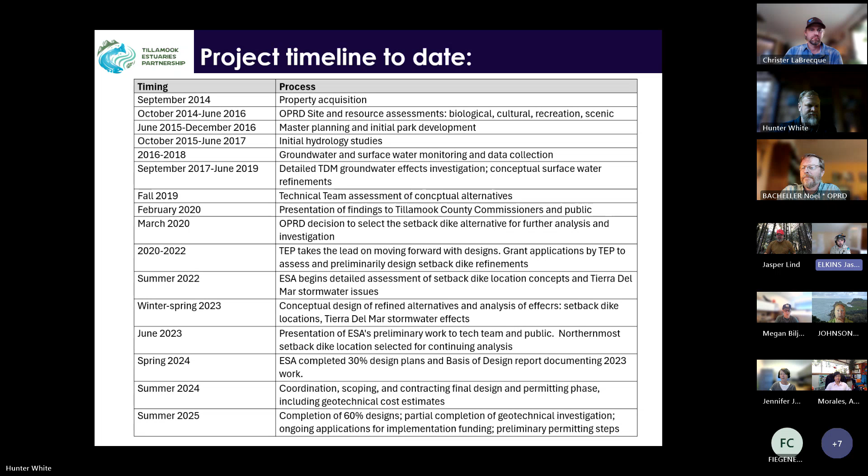We got to 30% design in spring of 2024, and we are currently at—Hunter and ESA just finished up 60% design. We'll be having a town hall on that October 3rd, on Friday. And with that, I'll get to Hunter, I believe.

Yeah, thanks, Jason. My name's Hunter White. I think most of you know I'm the senior civil and water resources engineer with ESA and project manager for ESA, pushing this design towards completion and permitting, working towards construction. So as Jason kind of recapped the long history and timeline of this project, this slide here is really the design phase that we're in now.

Back in fall of 2023, as Jason said, we presented the alternatives analysis, and shortly thereafter launched into our actual design process, taking that towards construction drawing format, and really a lot of the work and investigations that have fed into the permit applications that we're working on now.

Kind of skipping through that, here we are now. We've just completed our 60% design plans and sent those out to all attending here. With the 60% design set, we've also been working hard on the permit applications.

We completed a wetland delineation and functional assessment of the site, a cultural resources investigation, and geotechnical investigations. We've also been doing a lot of coordination with other sub-consultants on our team: geotechnical engineers Shannon and Wilson, as well as David Evans and Associates, who are designing the bridges, structural engineering, and roadway engineering.

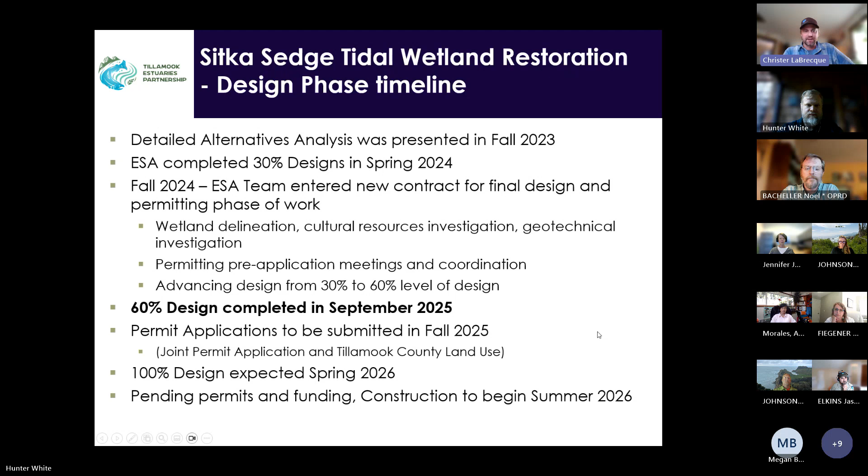Great, thank you. We'll spend the rest of the time going through a little bit of context for those that need it. It looks like most folks here are familiar with the project, but we'll give a really brief overview and then start diving into excerpts from our 60% plans, trying to leave a good amount of time at the end for questions and discussion.

For quick orientation on the location of the project: we're here in southern Tillamook County on Oregon's north coast. Zooming in, we're just north of Pacific City, and the small town of Tierra del Mar is at the south end of the project area. Here on the left you can see the park itself, with the park boundary in red, Beltz Dike separating Sand Lake and the open estuary from Beltz Marsh south of the dike, and again Tierra del Mar to the south.

We do have three streams that flow into this project area. Reneke Creek is the largest, coming in as the northernmost creek; Beltz Creek is right in the center; and then No Name Creek, in the area we've referred to as the East Marsh, is at the south end of the project area on the east side of Sand Lake Road.

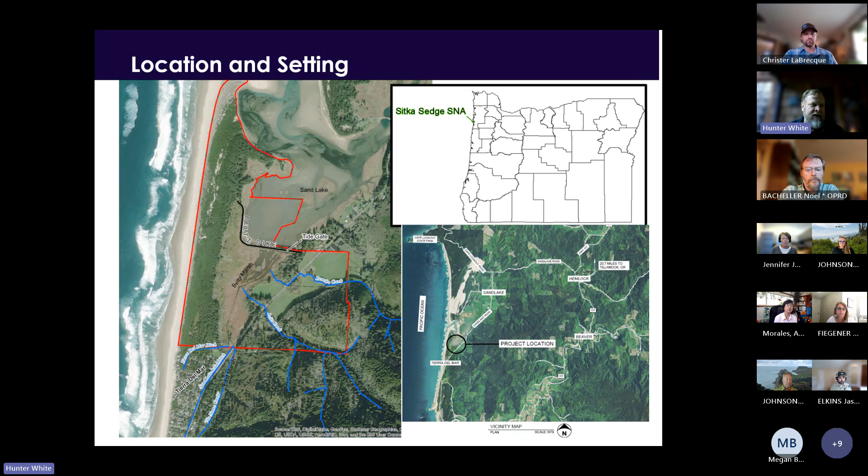The purpose of the project—most of you are familiar already—is that the existing tide gate structure out there is failing.

The tide gate itself is completely missing at this point, as seen in the bottom right. The structure has a lot of erosion around it, and it's kind of a matter of time before that embankment would fail on its own.

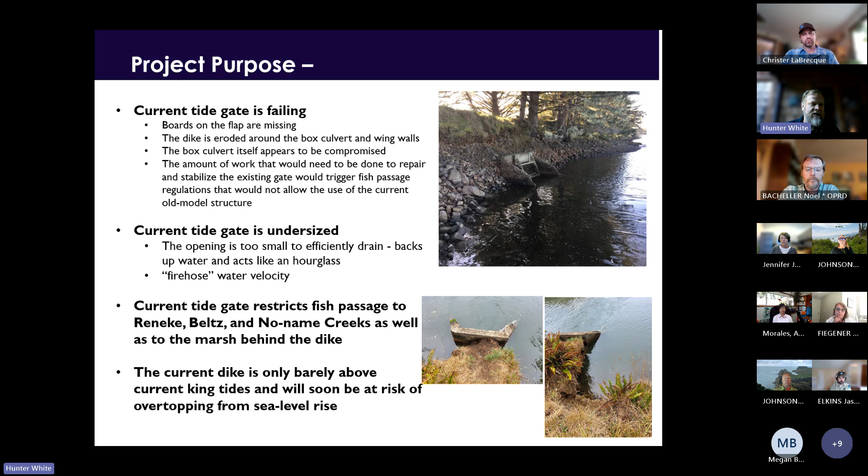So we really want to have a good plan and not have just an accidental breach that we're not prepared for. We also want to provide fish passage into the three creeks I mentioned. Briefly, for those who haven't been out there, at certain moments we have a lot of water rushing through the box culvert structure.

We really have very fast water moving through. We have these big eddies that set up both inside and outside of the tide gate structure, and that swirling motion is really causing a lot of erosion around the structure and eating away at that embankment—even a cool little whirlpool feature that sets up on the outside when water's draining in.

We went through several steps of alternatives analysis, looking at replacing the tide gate structure with a new modern tide gate system, a full dike breach—which is essentially what we ended up with—spanning with a pedestrian bridge, and then the setback dike concept, which was selected by Oregon State Parks as the preferred alternative, coupled with a dike breach, but building a setback dike at the south end of the marsh to minimize high tides from reaching Tierra del Mar and providing drainage for stormwater.

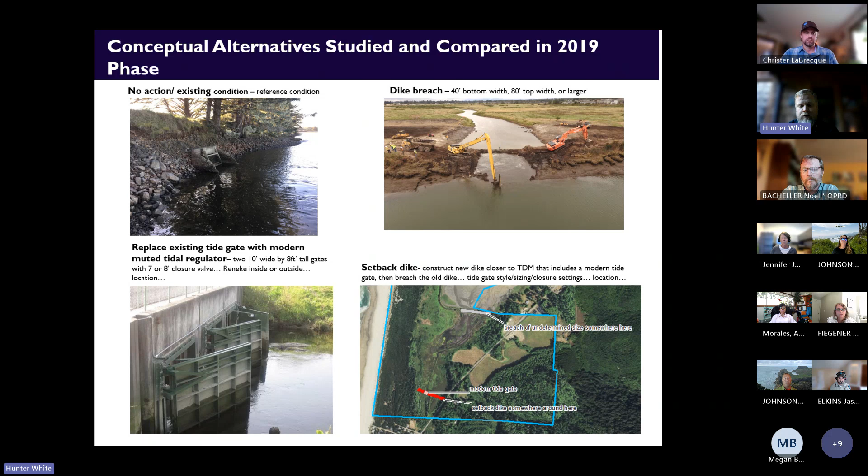As Christer mentioned, we're also working closely with Tillamook County Public Works. Each of these three streams crosses Sand Lake Road, and all three of them are fish passage barriers.

We're looking at Reneke Creek here, which is the largest creek and also the county's highest priority for replacement. This is a location where the road overtops frequently during the winter. It had a culvert that has filled in with gravels, so right now the stream is completely flowing through the roadside ditch, making a hard turn to get through the undersized culvert.

Reneke Creek culvert replacement and associated roadway improvements are part of the Sitka Sedge project now. Beltz Creek and No Name Creek culvert replacements are being designed to a 30% level, but there's not currently funding to take those any further, and they're not being advanced as part of the 60% and additional stages of design at this point.

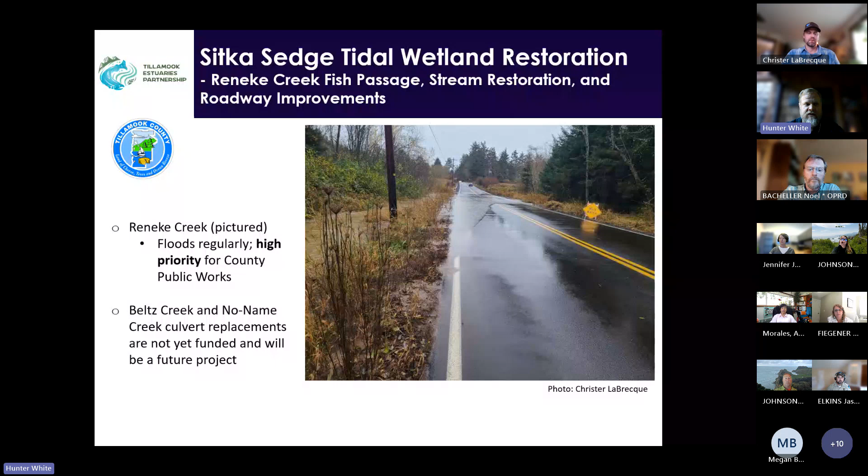So now here, looking at our preferred alternative concept map—north is down in this image, so we're over Sand Lake looking south into the project area. Starting at the bottom end, water will enter the marsh through a new breach through the Beltz Dike.

There's an amazing trail network out there on the dune, providing access out to the beach, and while breaching the dike, we also needed to maintain recreational access to this trail system. So we are spanning this dike breach with a pedestrian bridge that I'll get into in more detail.

Again, showing the setback dike at the south end of the marsh, which will be providing continued flood protection for Tierra del Mar and the low point at Sand Lake Road at the East Marsh crossing. And then Reneke Creek coming in from the east—we're doing a bit of a realignment, restoration of that floodplain area, which I'll talk about in more detail.

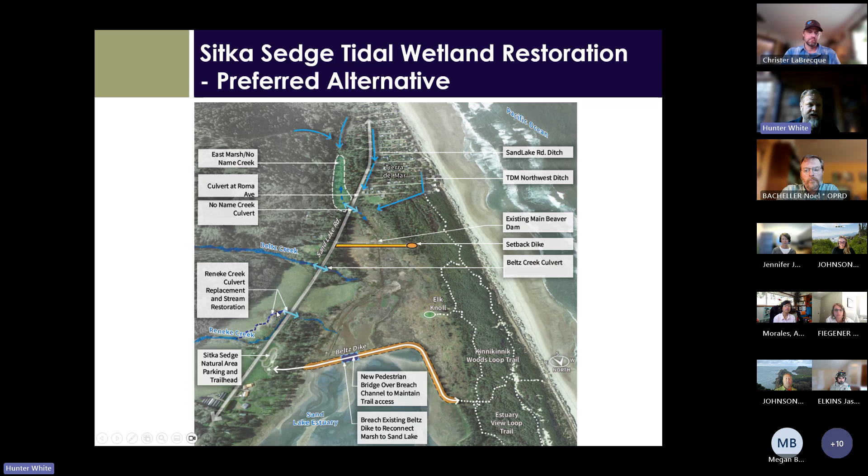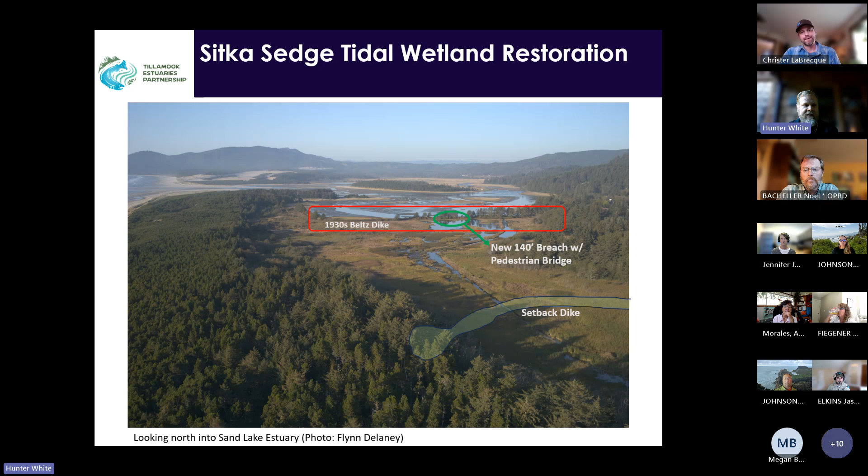A couple photos just looking out into Sand Lake from the dike, and then looking back into Beltz Marsh, the area that will be reconnected through the dike breaching.

Now we really switch into glimpses of our 60% design. With all the work, effort, and alternatives we've investigated, it really boils down to a few key project elements: the dike breach with the pedestrian bridge at the north end, the setback dike at the south end of the project, and some updates on the alignment and design logistics for that.

As you see here in blue, a new sinuous tidal channel network—we're proposing to significantly increase the tidal channel density within the area, since this is kind of our one shot at significant restoration.

This goes along with filling some of the linear drainage ditches, which Jasper pointed out in one of the overview shots at the start of the slide—filling the linear drainage ditch network in the center of the site, as well as the ditch that follows the backside of the setback dike, and then reestablishing a sinuous tidal channel network within a good portion of the marsh.

Some of the area closer to the center is really functioning as open water now. While there are a couple of linear features in there, the prospect of filling them is pretty daunting—it would take a lot of fill. Especially with higher water levels frequently inundating the marsh, a lot of that central area will just function as open water habitat.

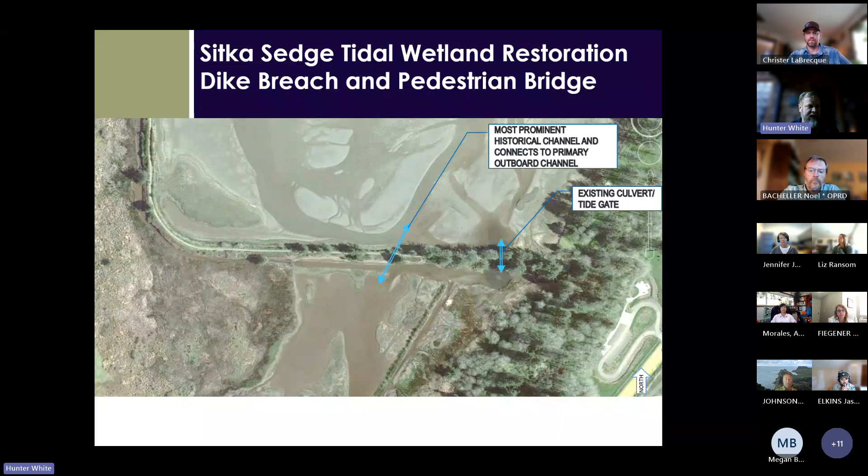This is showing some of the rationale and location for the dike breach, really looking at historical channel connections and even historical channels that are still there, identifying the primary, most dominant channel form that we wanted to connect into with our breach channel. This area highlighted here is what we'll zoom in on now.

Zoomed in at just the breach, showing the grading here. As mentioned, we want to fill these drainage ditches, particularly on either side of the breach, to redirect water out to the center of the marsh and line up to flow through our new bridge opening more directly. One thing we saw in the hydraulic modeling without filling these ditches is water coming in laterally and making a hard bend beneath the bridge, creating hot spots of erosion potential around the abutments—that's part of the rationale there.

We're also picking up flows from the east, the northeast corner of the marsh, where the existing tide gate structure is, and pulling those back in to line up with our new bridge opening. We'll also pick up flows from this linear ditch line that connects out into other areas of open water.

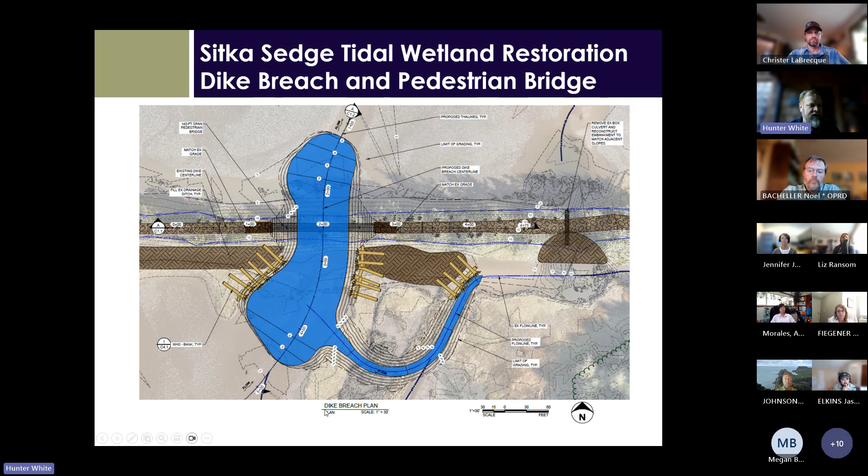This is a plan and profile view, zooming in more on the breach itself and the 140-foot span pedestrian bridge. David Evans has been working on the abutment designs and coordinating with bridge manufacturers, anticipating this will be a prefabricated pedestrian bridge, likely a Contech type of structure.

We're developing the breach grading here. I've mentioned in other presentations the question of how deep to make it. We're over-deepening it right now compared to the channels we're connecting into on either side, but anticipating that moving all this water in and out of this opening daily, this is roughly the equilibrium channel size we're designing towards.

We've done modeling around selecting the size of this opening and bridge. At one point we were looking at a 200-foot span, a 100-foot span. We're landing somewhere in the middle, a 140-foot span. Once you go above that, you get into a different size class of bridge, a different type of structure, and the cost becomes significantly more expensive, almost doubling or tripling, even for just 20 feet more of span.

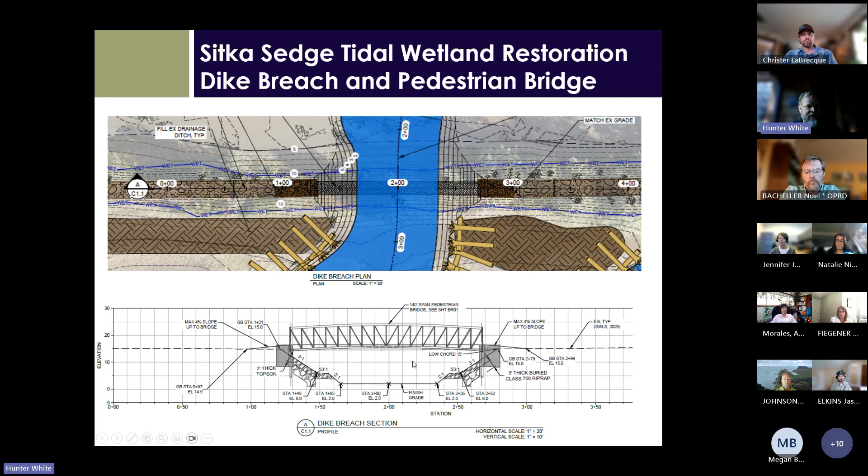This shot at the top is from David Evans' plans. Just to note, this says a 14-foot low chord elevation, but we're actually planning for a 15-foot low chord, and I'm cleaning that up with DEA. With the 15-foot elevation, that gives us about 3 feet of freeboard, or clearance, over the peak water levels we experience now.

We're having some discussions about whether we want to bump that up a little bit, but there are some other complications with tying in the trail and widening out the embankment. So right now we're designing for about 3 feet of freeboard over peak water surface elevations.

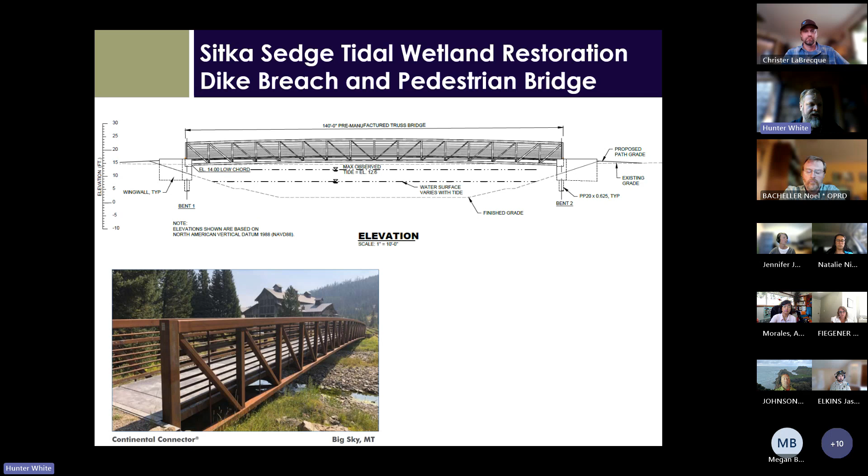The Continental Connector bridge model from Contech is shown here—a reasonable representation of what the bridge could look like out at Sitka Sedge, proposed as a prefabricated system. As we move toward final design and figure out how to bid this project, we'll need to decide whether to select the exact bridge we want or leave it to a contractor to provide a bridge meeting our design and performance criteria, with some flexibility in the details. We'll refine that as we move ahead, but again, this is just a reasonable representation of what the bridge could look like.

Moving on to the setback dike area. One of the main features always described and considered in this project is the existing beaver dam. It doesn't really come and go, but it does change its height and extent of inundation behind it—it has persisted throughout all the time we've worked on the project. There's also a beaver lodge further south in the channel network, with very active beaver activity in this marsh.

Both to provide enough stormwater storage capacity to accept all the flows off of Tierra del Mar in the East Marsh, and to give the beavers the southern 10 acres of the marsh to maintain as they're doing, drove our location of the setback dike crossing, which is about 100 feet north of the beaver dam.

What you see here is not the straight line represented in a couple of other diagrams in the past—we've refined this. Where we want to tie into Sand Lake Road, the road rises up as you move north, so cutting straight across and tying in was actually pretty high, with not great sight distances once you'd tie into Sand Lake Road. That was one reason for driving it further south. Also, Sitka Sedge has amazing vegetation for the most part, but there's a pocket of low quality vegetation—a lot of reed canary grass—in this area, so we're less concerned about what we're filling over there.

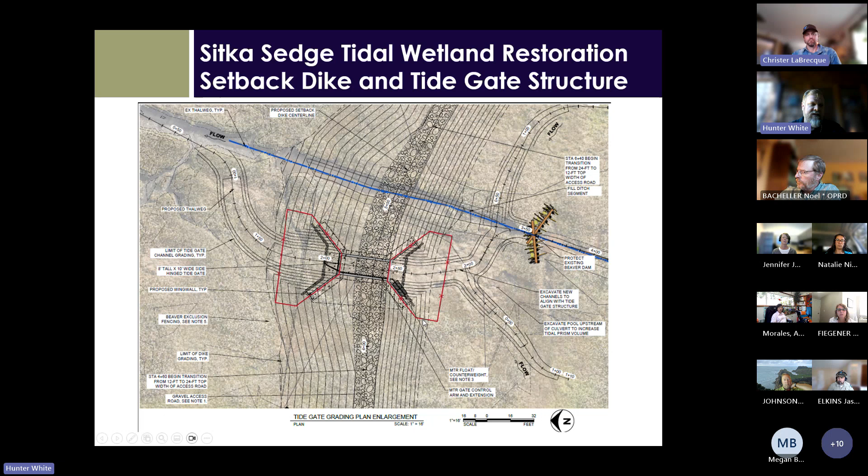This red fencing is essentially beaver exclusion fencing that is being designed with 6-inch gap bar spacing, in accordance with ODFW fish passage criteria for trout bearing but not salmon bearing streams, which No Name Creek has been classified.

We're proposing a 12-foot wide box culvert with a single 8-foot tall by 10-foot wide side hinge tide gate, and that system being controlled by a muted tidal regulator control system that will allow tide water in to a specific water level setting, likely 8 feet.

So we will get some tidal flushing on a daily basis, mostly downstream of the beaver dam, and we've created these extra little spurs of channel that will fill and drain daily as tidal channels. But then once that water level rises to 8 feet, the MTR will allow the tide gates to close and prevent higher tides from reaching the south end of the marsh. And during really peak tides, king tides up to 11 and even 12 feet, those water levels will not reach Tierra del Mar.

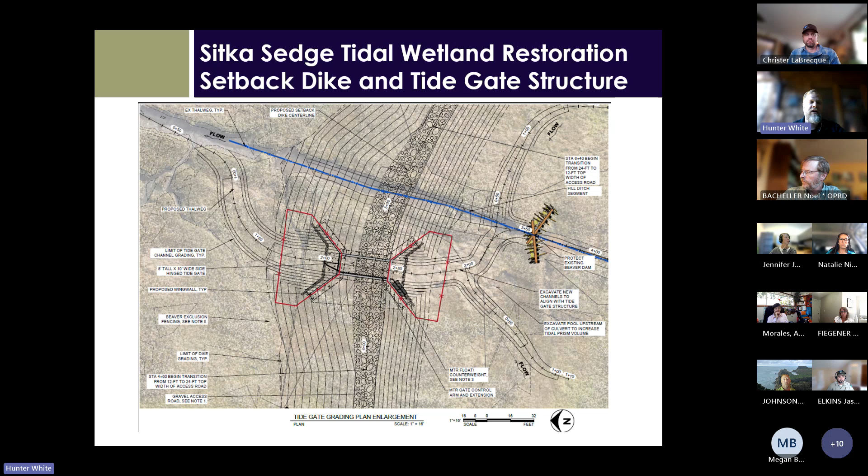And with that, the structure also will have great capacity to drain out all of the storm water coming off of Tierra del Mar and the East Marsh drainage.

Some of the other enhancements across the site, as I mentioned, these next couple slides are showing the ditch filling and new tidal channel excavation. These tidal channels are being designed based on ESA's and formerly Philip Williams and Associates tidal channel design guidelines, looking at marsh size, contributing marsh area, and tidal prism volume that will be moving and contributing to these channels. The channels are being sized through those methods.

Again, you'll see wood structures incorporated throughout the project, some of them more as a structural element, kind of a bank stabilization element, and then also just wood additions for habitat complexity and habitat value.

So again, at the south end of the project, we're doing a more heavy-handed filling of the central ditch line, remeandering the main channel, and then also pulling off tidal channel networks from there.

And here you can see Reneke Creek coming in at the north end, and then Belts Creek, which we are working on a preliminary design for, and ultimately in the future expect that this culvert is replaced. Both Reneke and Belts Creek are outside of the dike, so they will have full, unrestricted fish access, while No Name Creek is left behind the setback dike.

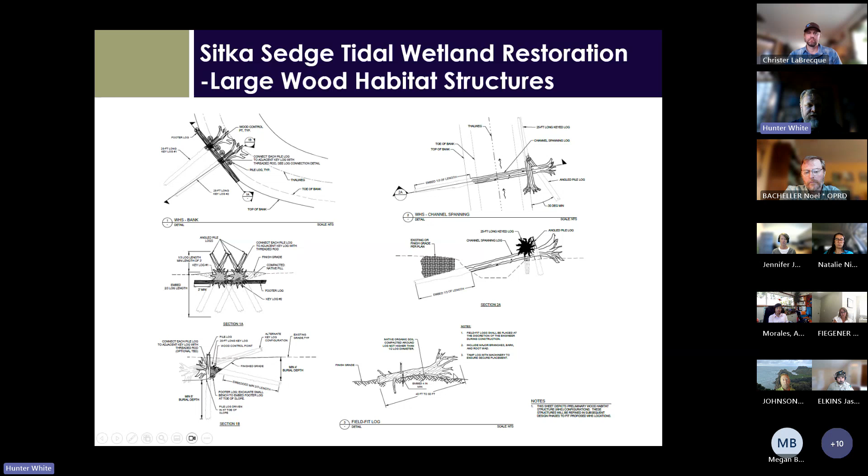These are just a couple examples of some of our wood structures: bank structure embedded in the bank providing stabilization, a channel spanning structure configuration, and even floodplain logs that will be incorporated primarily in this Reneke Creek area.

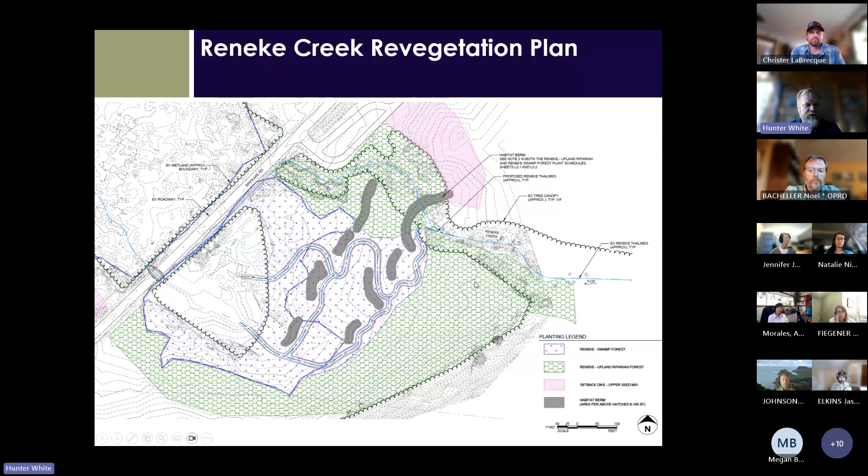The cool thing about this area is that there is this remnant patch of forested wetland down in this triangle at the bottom, in the lowland, focusing on a swamp, forested wetland plant community within the existing wetland boundary, and where we're realigning the channel through, restoring a lot of this area to upland forest as well, with a 49-foot span bridge down at that low point, and again raising the road up a couple of feet.

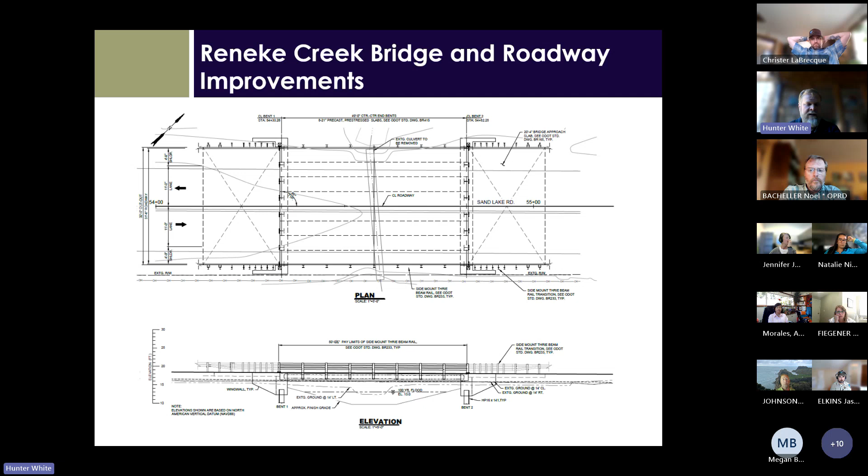These are just shots from David Evans' roadway and bridge design. As I said, about 650 feet of road will be affected by that.

We've done a lot of analysis of what the geomorphology of this area is, and it is an alluvial fan where the creek comes out of the steep hillside, flattens out, drops a lot of sediment, and has a tendency to change its channel path over time.

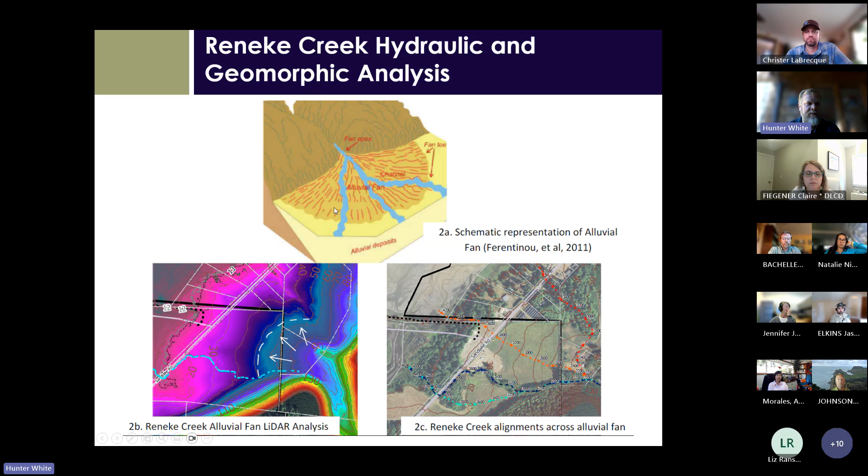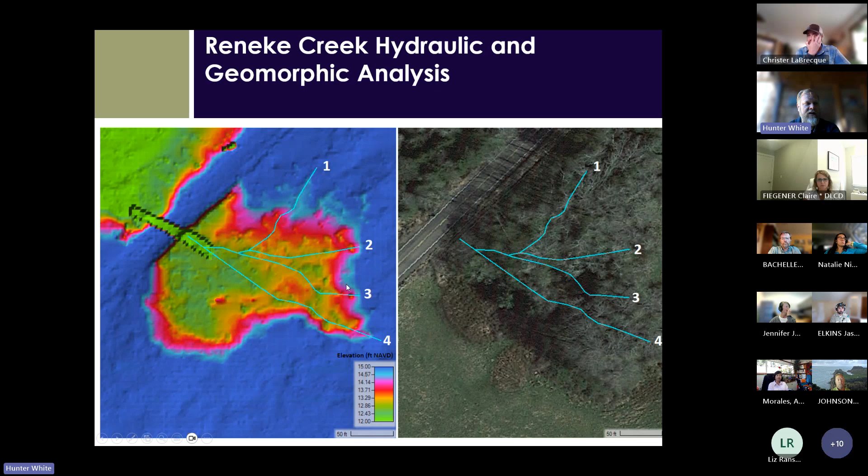This is some of our modeling of existing conditions and where Reneke Creek already pops out and accesses this floodplain. Within this remnant patch of forested wetland, there are channels still present. Our design would be tying back into some of these channels. Just a couple views of those.

I think I see Chris has a question, and that's a good time. It kind of leads us into the discussion portion of the call. This is just flipping back to the overview to kind of spur some questions.

So Chris, go ahead. Mine was just an added comment that I don't think has ever been discussed before. When we had that original 14-foot bridge that turned into the culvert became plugged, the road department was no longer able to clean the culvert because the fill on the estuary side had effectively blocked the flow of the water. So without cutting a channel through the estuary to allow Reneke Creek to flow like it was originally doing, the water was allowed to go down the ditch line to a much smaller culvert. So that culvert that is there now, that's plugged, a lot of the reason why we can't maintain it is simply because the estuary is silted in so much that maintenance was no longer an option. I just wanted to add that comment because I don't think we've ever truly talked about that.

Yeah, and so where Chris is talking about is essentially here where Reneke Creek hits Sand Lake Road, and there is a buried culvert there. There's also a man-made channel, which has been brought up particularly in the town halls, of why aren't you restoring Reneke Creek's original channel alignment? And this is where Chris is talking about, of course, where the channel used to cross the road there.

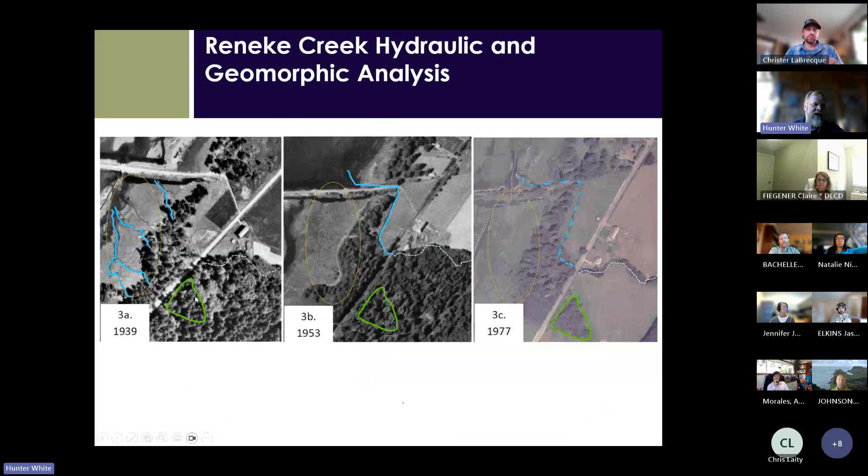And so even if a lot of the flows were being carried through that northern crossing, there certainly would have been times when during higher flows, this floodplain is activated. Water's always making it down to this low point. And even right now, if you go down there into this forested triangle, you see within these channels even just groundwater seeping out. And these channels, even without a good surface water connection, still end up having flow even in the summer. So again, seeing these remnant channels that are still there, still carrying water, and when flood flows activate this area, still do carry stream flow. So that's really some of what we're playing on with our restoration design.

Other questions and thoughts, ideas?

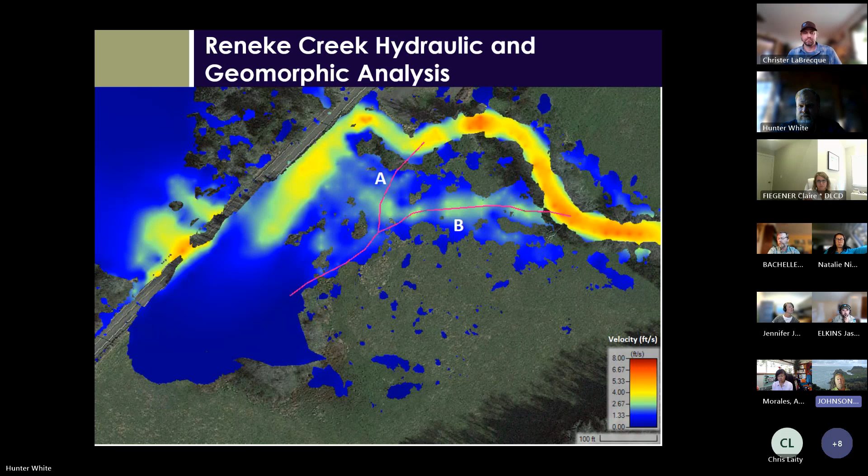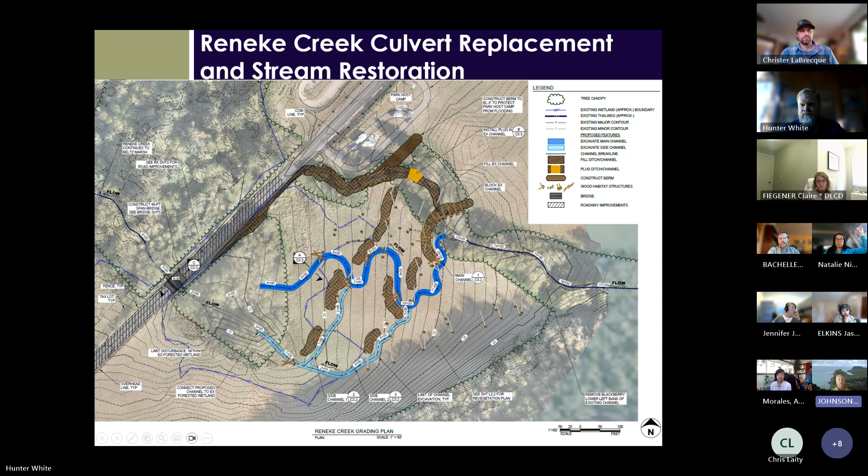Hey, York. Hey, thank you. I had a question about Reneke Creek. I know you mentioned that there's going to be limited ditch filling. Did you look at the confluence of Reneke? I assume it was hitting one of those ditches, and will that confluence be manipulated or left the same? And then how does that relate to where that ultimate ditch comes in near the breach, and you showed that kind of U-shaped channel? Could you talk a little bit about the hydrology there, please?

Reneke Creek, on the upstream side of the road, sits in the roadside ditch and makes it down to the low point, crossing that road. As mentioned, Reneke carries a lot of gravels, and downstream of the road it has started to braid itself again, creating a multi-threaded channel network through beaver activity and sediment deposits that push the channel around. Even in the years I've been watching this area, I've seen a lot of channel development downstream of the road, with a couple of well-defined flow paths. I'm sure it changes year by year, but there are two pretty well-defined flow paths that connect Reneke Creek out to the main channel network.

So no, we're not proposing to do any work in there. In fact, it's all really well forested with nice vegetation, so it's kind of restoring itself. If you zoom out, there's not even really a ditch line, but there is a berm in between the channels, so it does look like an obvious linear feature. But it's pretty wide and really functions as open water at many water levels. Reneke Creek has a couple of nicely developing channel connections into that larger channel and basin. Does that answer your questions, York, or do you have other thoughts?

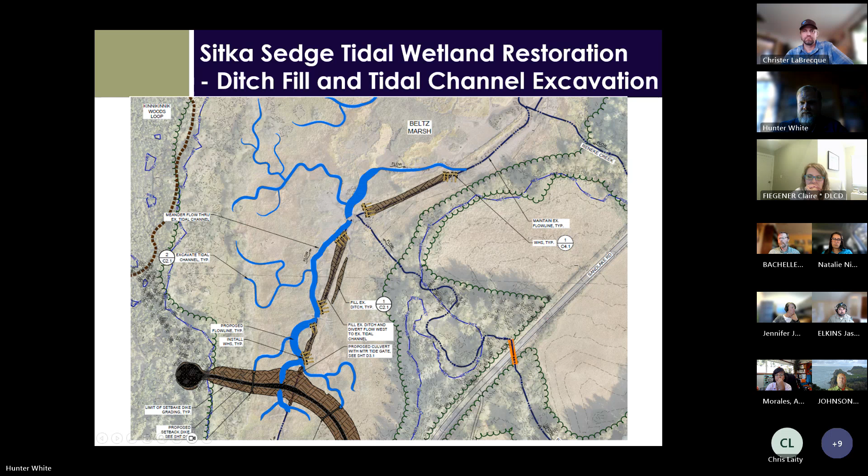Flip back to the overview, and yeah, definitely interested to hear from others. Thanks, Hunter.

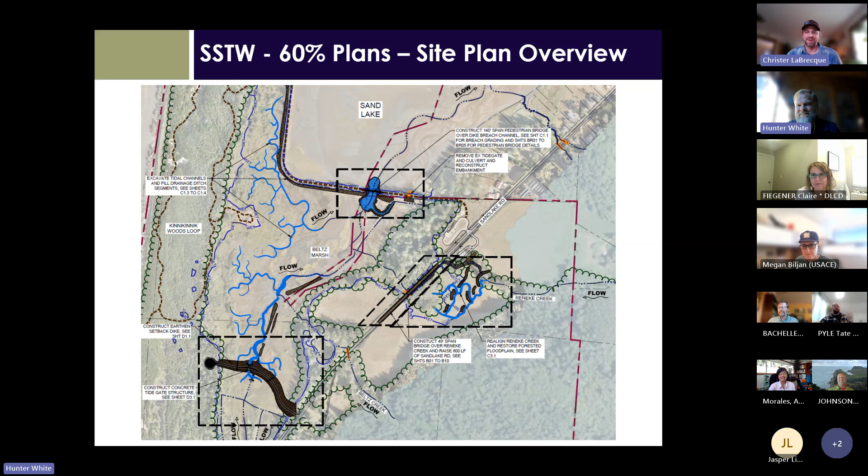Thanks very much, everybody. Appreciate the time and input. Thanks, everyone. Thank you. Thank you very much. Have a good day. Bye-bye. All right.